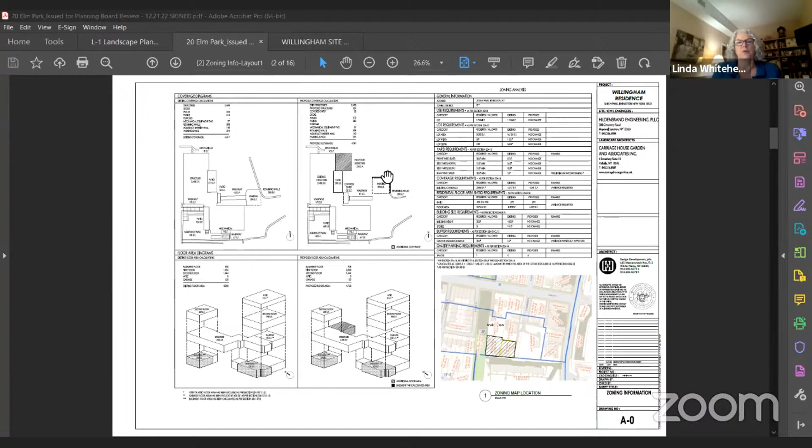If you could just bring up the site plan and briefly go through it. We have 16 items, so please be brief. We were trying to be brief, but yes, Nick, can you bring it up? Mark Schulman is the architect from Design Development. Will take you through it quickly and remind you what we're proposing to do here. Just the site plan.

Good evening, everyone. As Linda said, my name is Mark Schulman. I'm the architect with Design Development Architects in White Plains. Quickly going over this, and I know we presented it last time, but essentially there are a couple of moves being made here. One is an addition on the north side, an expansion of the building footprint that does encroach over the rear yard setback and over the buffer by about a foot. And just to refresh your memory, we've eliminated all work that was actually facing the aqueduct buffer. So this is where we have 2 variances required.

We have also reduced the footprint substantially on that single floor addition. And the other move here is that we have...

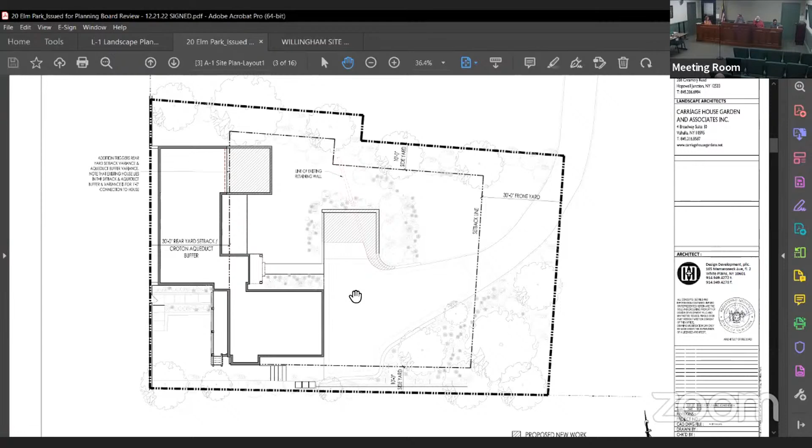Okay, thank you. Any additional comment on the resolution from the board? No comment, no comment. Going to take a vote. Did Dan authorize me to sign? Dan authorized signature, okay, I approve. Dan, you need to vote and designate Sarah to sign. Okay, I approve and designate Sarah to sign for me. I approve. I approve. I approve. Okay, we're done with that.

Thank you very much. I like your surfboard in the back, or is that a paddleboard? Yes, that is a paddleboard. Thank you very much, have a good evening, good night. Mary Ann, I hope you feel better. Yeah, thanks.

Now we're moving on to number 2, 2022-35, 15 Jaffray Court. While we're waiting, I should note that we had a second letter from the neighbors, Maria and Peter Agudino, concerning drainage.

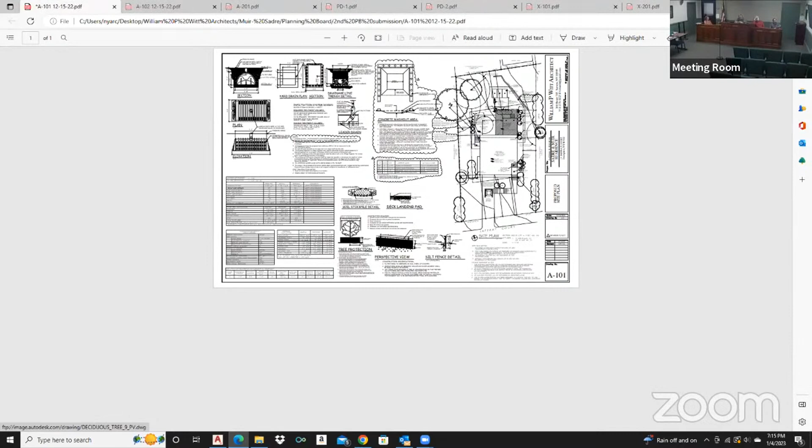In addition to those plantings, we are proposing some additional low plantings on the west side of the deck. That should be nicer to look at, and also aid in some water runoff that may happen from the deck in that area.

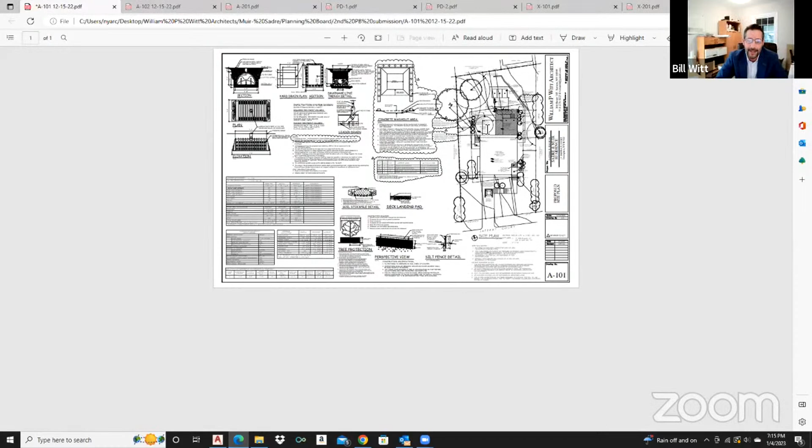In addition to that, we were asked to clarify the under-deck materials. There were notes on the plan specifying that under the deck, we are going to install 6 inches of crushed gravel over a fabric soil separator. That is really meant to mitigate any water that perks through the deck.

As far as the deck details, which aren't part of the site plan or the floor plans, we are proposing to use Trex decking, noted on the elevations. Trex decking gets installed with a standard hidden fastener, which allows a 1/4-inch gap between deck boards, industry standard for this type of decking material.

Much bigger than that creates a hazard for people walking on it with heels. Much less than that, it doesn't allow the water to percolate. Obviously 1/4-inch is ideal. You could go as low as 1/8, but with deck hidden fasteners, 1/4-inch is what's presented.

Another item we were asked to do is propose a concrete washout area. That has been proposed in the staging area of the driveway.

In addition to that, there were a few comments from some neighbors. They basically had to do with foundation plantings and location of AC condensers. Again, I pointed out that that was relocated.

There were some concerns about dust, and we've added a list of dust control notes on the plan. So if work is happening on dry or windy days, we're proposing to spray down the site with water occasionally just to keep the dust down. I don't anticipate much of a problem, since the exterior work is really excavation in the back of the house, so we don't anticipate much of a dust issue.

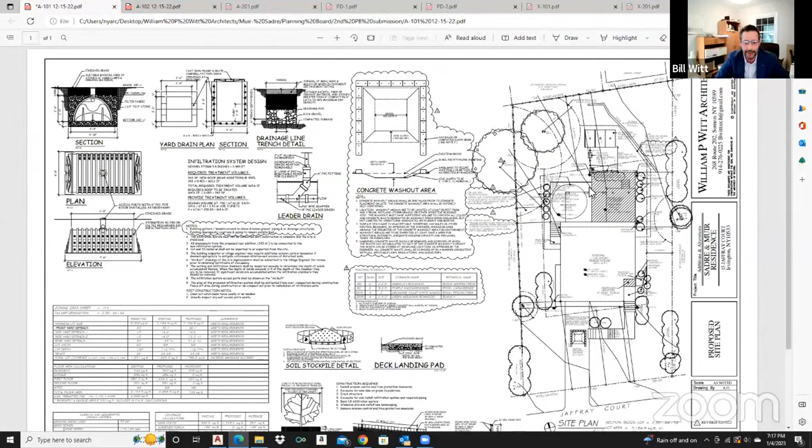Could you briefly go over the magnolia tree protection? Sure, let me just zoom in.

After speaking with the landscape architect, she recommends that we install 3/4-inch plywood sheets over 8 inches of wood chip, just to prevent any compaction of the soil or damage that might occur with vehicles. That tree is approximately 6 feet off the fence line, and I know there might be a discrepancy on what I'm calling the critical root zone there.

But the only work happening in this area is 3 piers to be dug for a deck foundation. The rest of the work is outside the area. I believe there's a note on the plan about accessing that side from the right of the property, limiting machines from traveling over that critical root zone.

Okay, there was a comment about the new plantings on the east side not impacting the neighbors' plantings to the east. We actually had a conversation with the neighbor, and we all agreed there were substantial plantings on the property line, and that any new plantings should be considered foundation plantings to soften up the house, not necessarily to provide screening. They enjoy being able to look through the properties, and like that there's no fence there now. Both the neighbor and the new homeowners would rather not plant a row of arborvitaes down the property line.

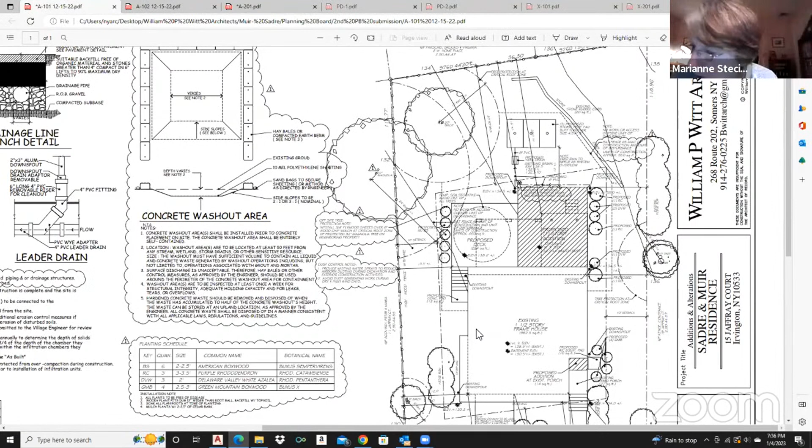Thank you, Dan. Go ahead, Mary Ann. Yeah, in November 2022, Lauren Muir and Nader Sadre applied for site development.

Hold on, Mary Ann, hold on. Did you raise your hand? Yes, I did. Would you kindly come up? I guess you want to come up if you raise your hand.

Yeah, certainly do. I tend to disagree with the dormer. The dormer now does not have a gutter and leader system. In the 25 years I've been there, the water has dripped from the entire length, maybe 12 feet, or 8 feet, 2 feet, whatever it is, of the dormer into the gutter below. It was never directed into a skinny downspout, into a steep pitched roof, and then into a narrow 4-inch K-style gutter. That will cause an overflow condition, no doubt in my mind. And not only would that be detrimental for me, it would be detrimental for the homeowner on its foundation side.

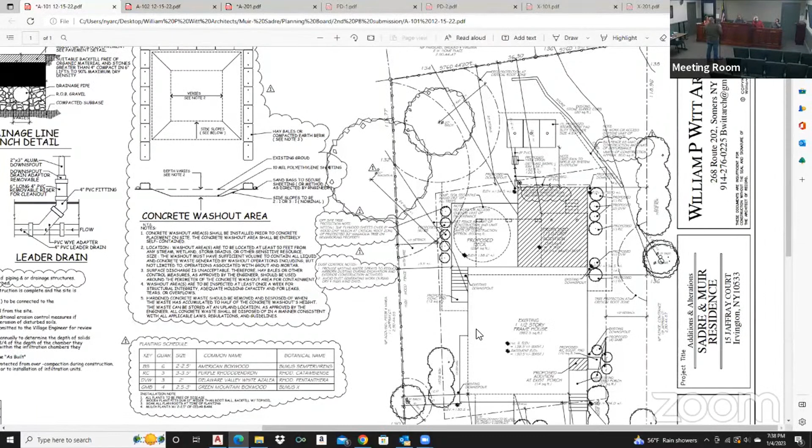Okay, thank you. I'll ask the engineer to take a look at that again. Doug, you hear what he said? Yeah, right now it runs off the dormer and into the gutter. In the future condition, it'll run from the dormer to its own gutter, to the same gutter system. If that overflows, it's going to go back to the same gutter it goes to now.

Doug, can you just show us where this is occurring?

Bill's circling it right now. Yeah, this is approximately an 8-foot wide shed dormer that doesn't have a gutter on it.

I'm proposing a gutter and a leader drain that's just going to collect the water, prevent the water from overflowing the roof in front of windows that might be open, and coming down to a short leader that dumps it down to the existing roof.

Still the same amount of water being collected in the same drainage system. Again, this is not a large house to begin with. It has leaders on both ends of the roof. I feel fairly confident that it's more than adequate with the new gutters to collect the existing amount of water and direct it into its existing location.

The amount of water is not changing. It's just being collected so that it doesn't go over the window on the dormer. I think his concern is that instead of allowing the water to shed over the dormer over the 8 foot, it's being collected into a 1 leader drain. I just don't think that's enough of a roof to cause any issue.

So if I could. Go ahead. Bill, leave that up there. Sure. Mr. Agavino? Could you just go up to where it's circled and with your finger point out to us what your concern is?

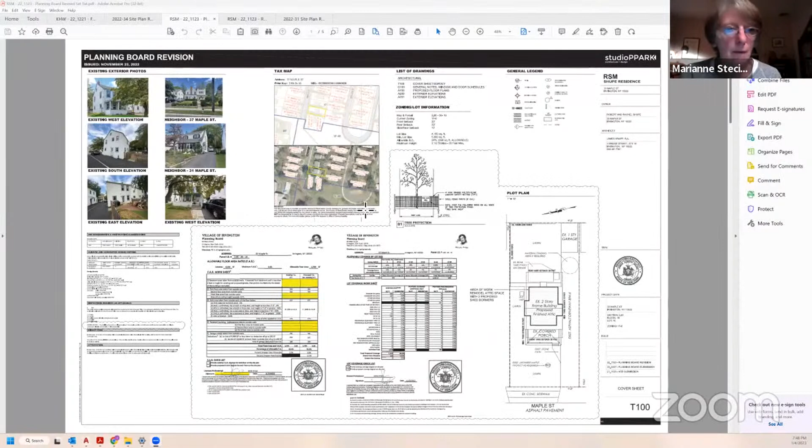Just put up the view of the front of the house. Sure, I can share my screen, correct? Can you guys see me? My screen now? Yes, yes. Okay, great. So, here's the existing, previously approved, and proposed as of today.

And they meet all for coverage. Yep, yeah, everything is under, we're here basically for site plan approval related to FAR, and view preservation, as opposed to any variances of any kind.

You had view preservation issues, which was taken care of. Large tree protection, I have a note. Do you have tree protection? Yes, we specified tree protection for the Japanese maple in the front. We don't believe we're going to be anywhere near it, but we are ready to take care of it as needed.

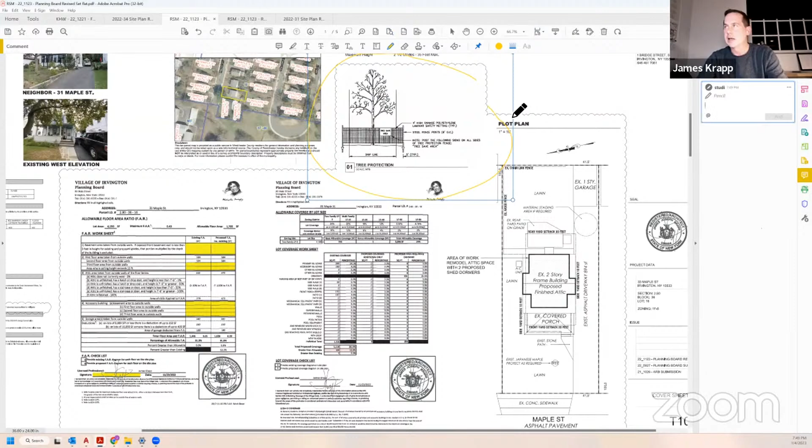Okay, any comment from the board? No comment. No comments. Sarah, anything from the public? Nobody's raising their hand to speak, and there are no comments in the chat.

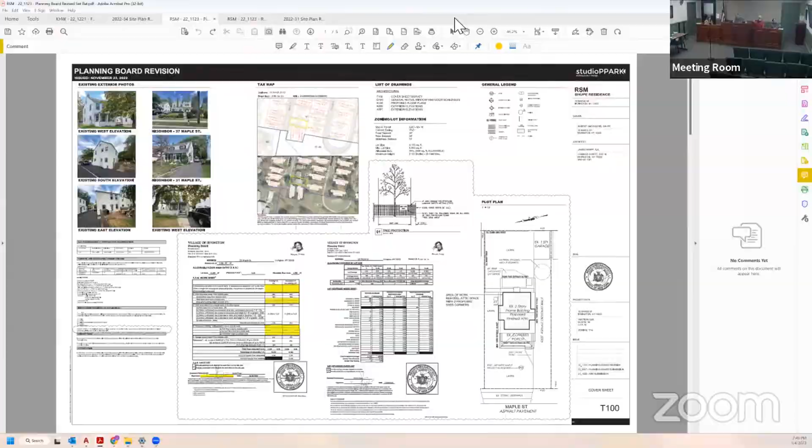Thank you. Mary Ann, you have a resolution prepared? Yeah, whereas in November 2020... Yep. Mary Ann, you're going in and out.

Okay, I don't know what happened. Can you hear me now? Yes. Okay, and I think you probably heard the first part: Hahn Engineering reviewed the plans and in a memorandum dated October 31st, 2022, made a number of comments which were addressed in a subsequent submission. Suzanne Nolan, the village's landscape consultant, reviewed the plans and made several recommendations which were all addressed in a subsequent submission.

The planning board held a public hearing on the application on November 2nd and January 4th, 2023. The proposed improvements would not negatively impact the view of the Hudson River from neighboring properties, and the action is a Type 2 action under SEQRA and therefore requires no environmental review. Now therefore be it resolved that the planning board grants the application for site development plan approval for the improvements reflected in the drawings entitled Shoup Residence, prepared by Studio Park Architects and Design, with sheets specified, and there are no conditions.

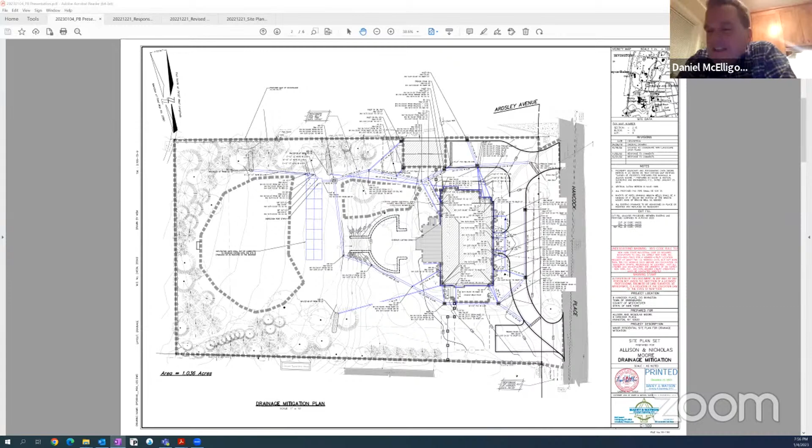Okay, thank you, Mary Ann. We have a motion. Motion to approve. Do you have a second? Second. Approved. Approved. Approved. Approved and designate Sarah to sign for me. Well done, good luck with that, and it looks like it's going to be a very nice result. Thank you very much.

The next is number 5, 2022-32, that would be 242 Harriman Road.

Good evening, hello. Can you hear me? Hi, yes we do. I'm Nancy Rosner, the property owner at 242 Harriman Road. My landscape architect had a conflict until 8:30 and asked me to jump in and see if you could move us to later. I think we're okay. If you want to go later, it's going to be late. We understand that, she felt she should have a presentation available. What time would she be available? She said 8:30 at the earliest. We'll still be here, we'll come back. Okay, I appreciate it, thank you. Around 9 o'clock we'll come back to this one. Thank you so much.

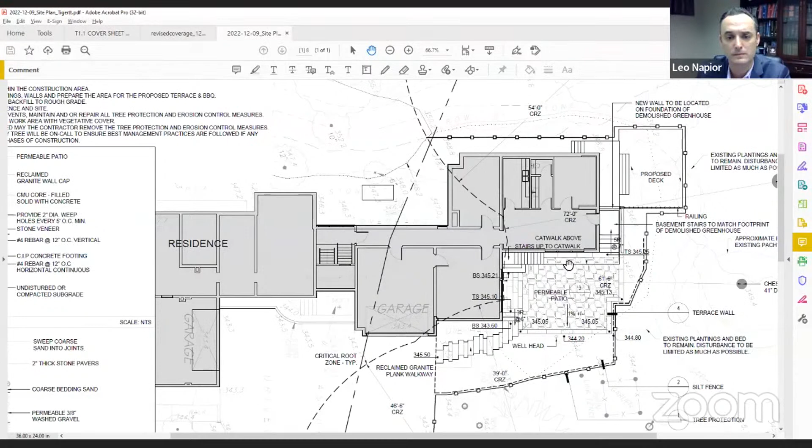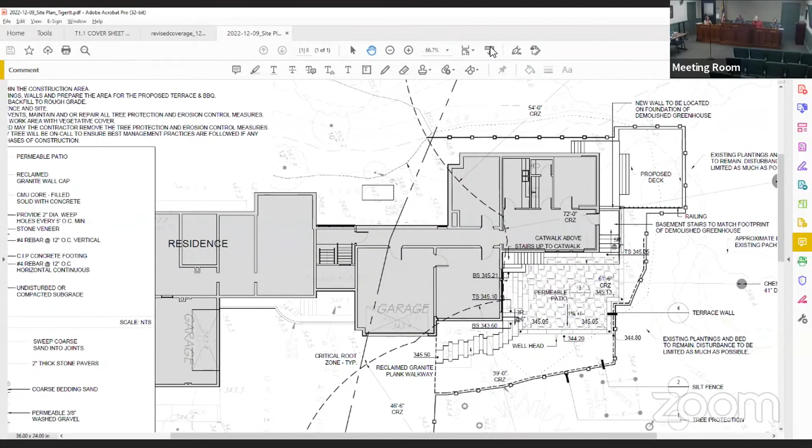Ed, you have the new numbers? We went over them on Tuesday. Okay, they have not yet gone to the ZBA? No, not yet, but they need to. Okay, and you're happy with the FAR and coverage numbers? Delighted, delighted - that's what Teddy Roosevelt used to say, delightful. Anyway, thank you very much.

Any comment from the board? No comment, no comment, no comments. Dan? I have no comments. Thank you. Sarah? Nobody's raising their hand to speak and there are no comments in the chat. Okay, thank you very much. Mary Ann, do we have a resolution? Yeah.

Whereas in November 2021, William Tiggert applied for site development plan approval to construct patios and a deck at his property at 59 Havermeyer Road. Whereas Hahn Engineering, in a memorandum dated November 2nd, 2021, had extensive comments, including that an existing pergola and shed were undocumented. And whereas in December 2022, Tiggert revised his plans in response to Hahn's comments, including seeking to legalize the pergola and shed. And whereas, although the plans remove areas of gravel, permitted coverage is still exceeded, necessitating a variance from the zoning board of appeals.

And whereas Hahn Engineering reviewed the revised plans and in a memorandum dated December 30th, stated that all engineering issues were adequately dealt with. And whereas the village's landscape consultant reviewed the 2021 plans and made several comments which were addressed to her satisfaction in the subsequent submission. And whereas the planning board held a public hearing on the application on November 3rd, 2021 and January 4th, 2023. And whereas the action is a Type 2 action under SEQRA and therefore requires no environmental review.

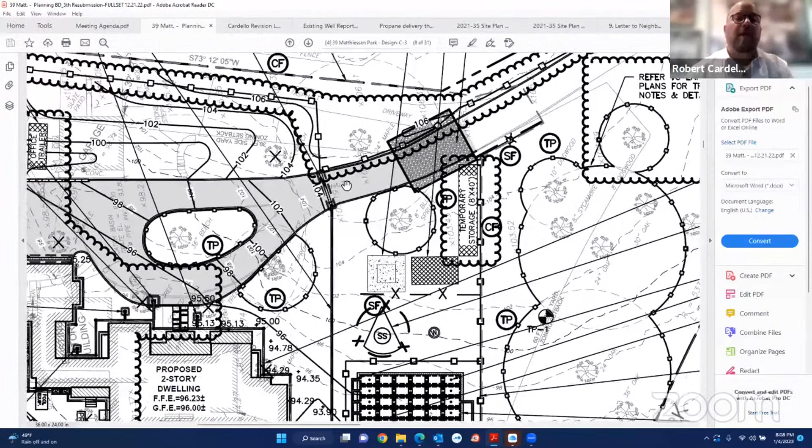The original application - interested in the location of the trailers, that's all. Oh, that's it. Okay. We have the storage container here noted as 8 feet by 40 feet, and the office trailer back here, which is noted as 8 feet by 20 feet. We had a storage trailer too somewhere. It was the first one I showed. Oh, okay. And I think I requested a fence, which I think I see there.

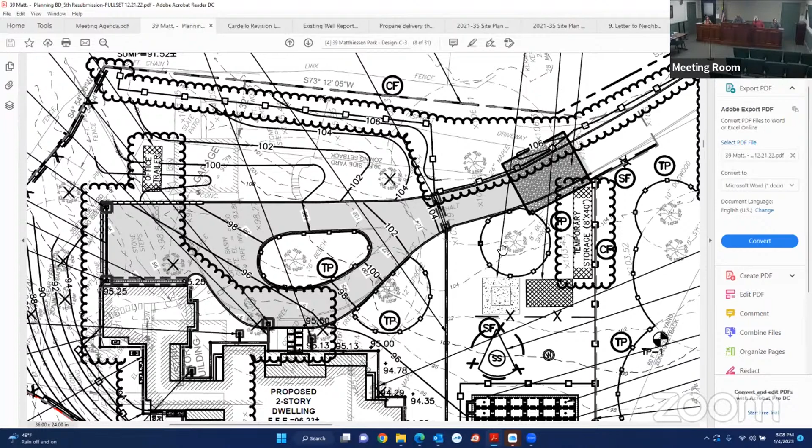Yes, along that juniper line, the junipers to the east would be protected, their roots would be protected. Is that the fence there? Yeah, you see it running along here with the bubble note representing that it was added to the application. Okay, thank you. Any comment? No comments. Mike? No comments. Sarah, any comment? Nobody's raising their hand to speak and there are no comments in the chat. Okay, thank you very much.

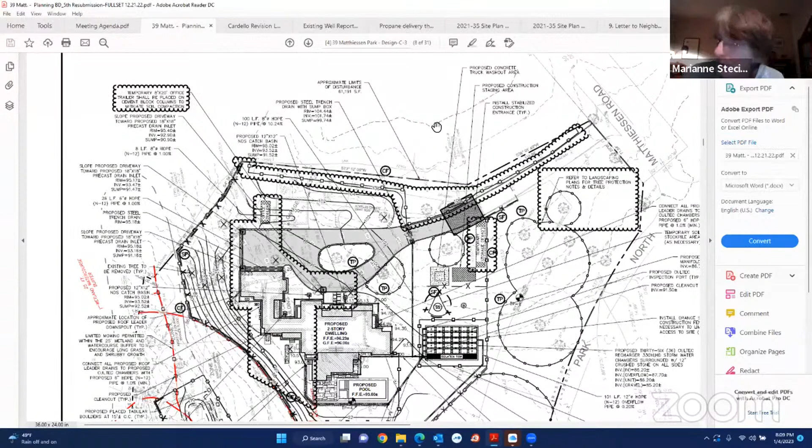Whereas on December 1st, 2021, the planning board granted to Lisa and Robert Bittencourt site development plan approval along with floodplain, wetland, and water bodies and watercourses permits for the demolition of an existing house and pool and construction of a new 2-story house and pool, patio, and retaining wall at the property at 39 Matthiessen Park, which is located in the View Preservation District. And whereas because the proposed amount of disturbance exceeds 1 acre, a notice of intent was filed with the New York State Department of Environmental Conservation. And whereas on November 23rd, 2021, the Zoning Board of Appeals granted a variance for location of the proposed pool in the front yard.

And whereas in December 2022, applicants applied for revised site development plan approval to add HVAC condensers, pool equipment, a generator, a new domestic well, a new buried propane tank, a temporary contractor office trailer, and a temporary construction storage container. And whereas Hahn Engineering reviewed the plans and in a memorandum dated December 5th, 2022, reported that the proposed changes would not have a significant impact on the site or stormwater design and would not affect the previously issued floodplain, wetland, and water bodies and watercourses permits, but did list several other issues which were addressed in a subsequent submission. And whereas Suzanne Nolan, the village's landscape consultant, reviewed the plans and made 2 recommendations which were addressed to her satisfaction in a subsequent submission.

Whereas the planning board held a public hearing on the application on December 7th and January 4th, and whereas the proposed changes would not have any effect on the view of the Hudson River from neighboring properties, and whereas the action is a type 2 action under SEQRA, therefore requires no environmental review.

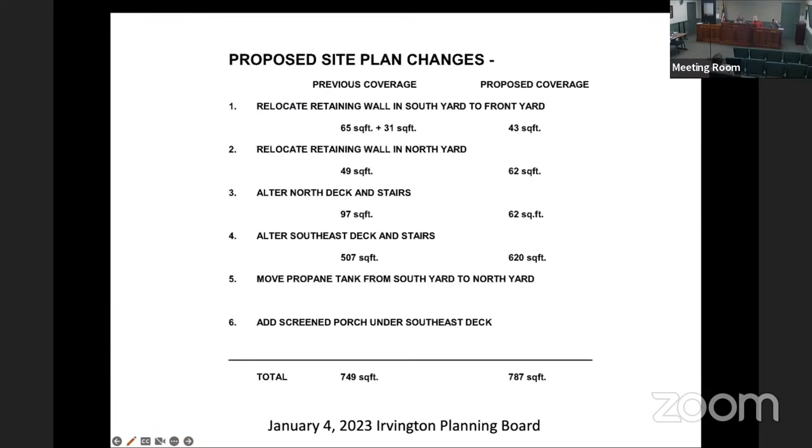It'd be nice if you had the site plan up so you can point to it. I'll switch to that then, just remember there are 6 things. Okay, so let me get down to that.

That results in a net reduction of site coverage. A second item is on the north side of the house. We had a retaining wall here before with a series of stone steps coming up to an entrance and a terrace. We've eliminated that retaining wall, that terrace, and those sets of stairs, replacing it with a new, smaller retaining wall and exit from the family entranceway, just a small set of stairs coming down onto a stone pad. This is going to give them a better play area. I should go back - one of the reasons we did this on the south side is the neighbor to the south has asked us to increase the number of large trees being planted.

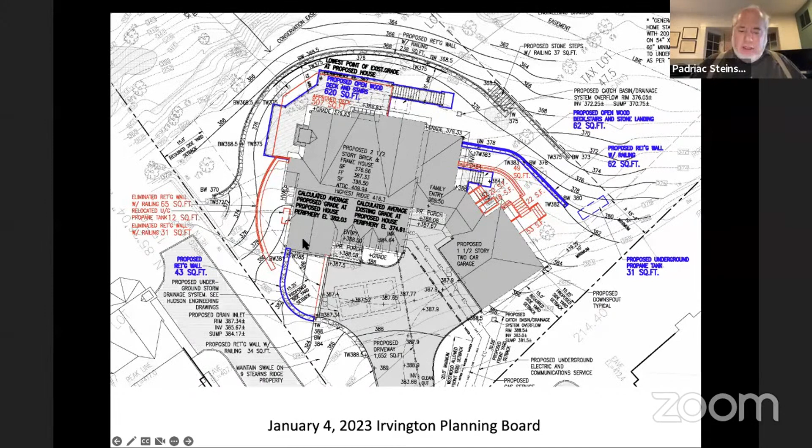If I go back a couple, I did have some photos that demonstrated what that whole feeling was. Up in the upper right-hand corner here, you're seeing 9 Stearns with 7 Stearns to the right. If I blow that up, you can start to see how they relate to one another. The area where the chimney is, that's just plywood right now, but it'll be brick. The deck is right next to that. It's an 8-foot deep deck, so it's not a large deck, and it's actually quite a distance away from the Benais's house.

Is the 8 foot the new dimension? The new dimension is 8 foot. So you said there's a porch underneath the deck? Yeah, what they would like is a screened area underneath the deck so that in the summertime they're not bothered by mosquitoes and bugs and stuff. That's fully underneath the deck - you won't really see that from anywhere.

So when you bump out the deck, you're bumping out the screened porch also? The screen porch will be following the deck exactly. So the structure is actually bumping out, not just the deck? The screen panels, yes - it's a relatively transparent structure, but it is a structure. Yeah, it is.

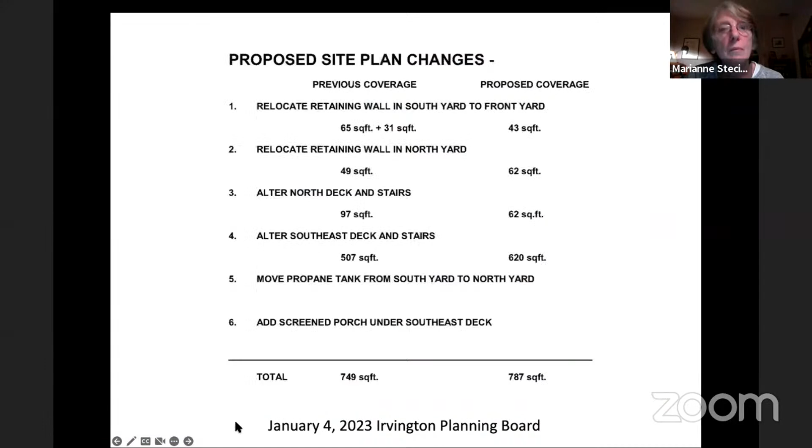Okay, so I've got to do both copies. Are you still writing it? I'm going to the second copy now. I'm printing, not writing. The second one I got better. Keep that copy for the village, give the messy one to Patty. That's fine, I don't mind.

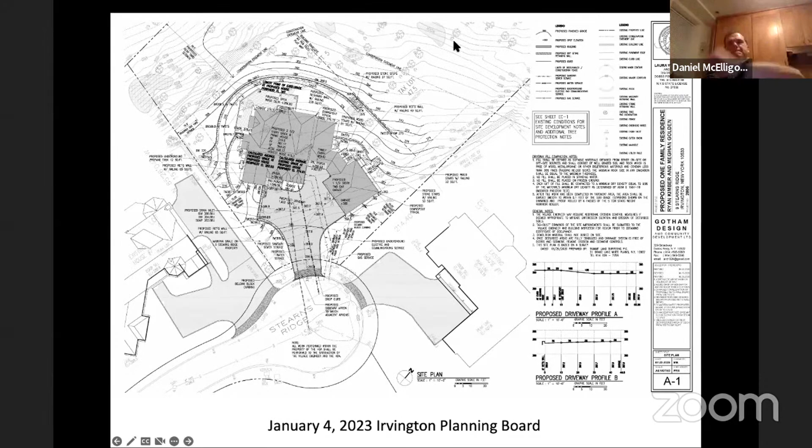Okay, we need to revote. I make a motion to approve the amended version of the resolution, since we didn't vote before. I make the motion that we approve the amendment, the handwritten amendment regarding the at least 3 large Norway spruce trees. Second. I vote yes. Approved. Approved. Approved, and designate Sarah to sign for me. Okay, thank you very much.

Moving on to number 10, and then we'll come back to 242. Number 10, 2019-20, that's 2 Barney Park.

John Malone, Ferguson Malone Architecture, presenting the Honstein, Ray Honstein project. This is a slight modification to what we presented last week, which was the addition of a small walkway. We had a permit process for a generator going under a separate course, and Ed reminded us that if the site development plan had been resolved and closed out, that would have been appropriate, but it's still not closed out, so he asked us to add the generator to this proposal.

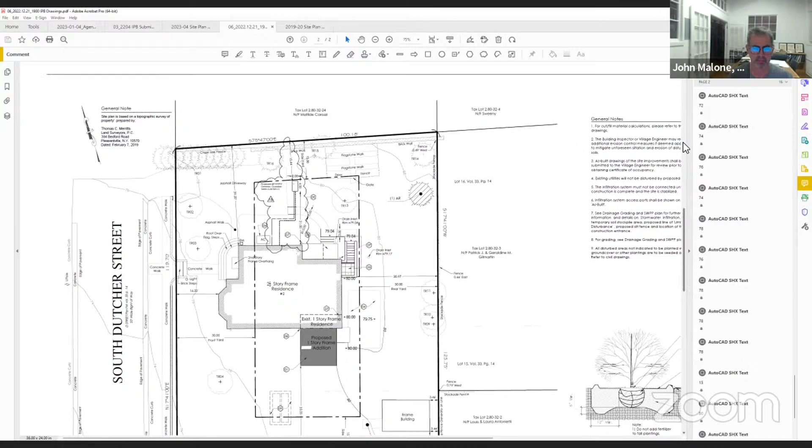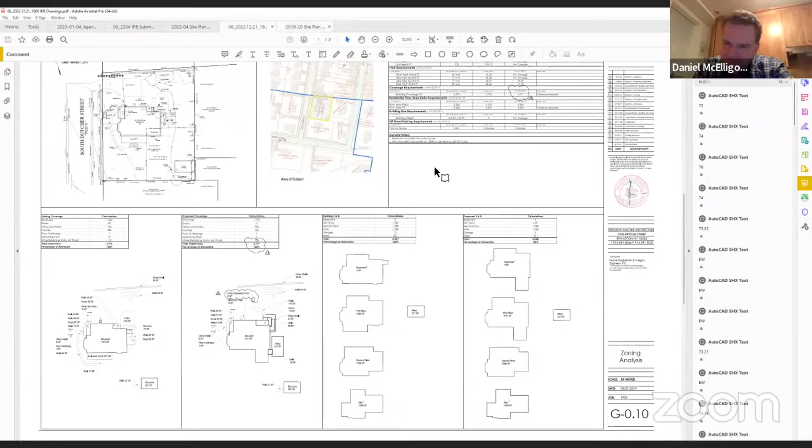Okay. Anything else, John? I think that's the only change on this one. Okay, thank you. Any comment from the board? No comment. Mike? No comments. Dan? No comments. Thank you, Mary Ann, do we have a resolution on this?

Whereas on October 2nd, 2019, the planning board granted site development plan approval to Laura Gray and Robert Honstein to construct an addition to their house at 2 Barney Park, along with a patio, walkways, and other improvements. And whereas in 2019, the proposed improvements received a coverage variance from the zoning board of appeals. And whereas on December 7th, the applicants received revised site development plan approval for an additional walkway on the site, which requires a new variance from the ZBA. And whereas in January 2023, applicants applied for further revised site development plan approval to install a generator requiring a variance for the additional 8 square feet. And whereas Hahn Engineering reviewed the plans and in a memorandum dated December 30th found no issues with the application.

Whereas the planning board held the public hearing on the application on January 4th, it's a type 2 action under SEQRA and therefore requires no environmental review. Now therefore be it resolved that the planning board grants the application for site development plan approval of the improvements reflected in the drawings entitled Gray Honstein Residence prepared by Ferguson Malone Architecture, subject to receiving a variance from the ZBA for coverage.

Sarah, was there any public comment which I didn't ask before? No, no one's raising their hand to speak and there are no comments in the chat. Okay, thank you.

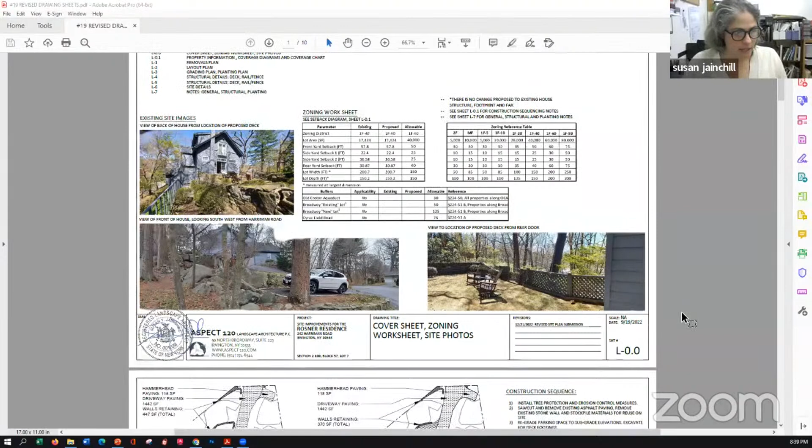We also addressed a number of issues in the drawings, including just readability of the drawings, as well as adding information, including a grading plan and a planting plan, as well as a deck design detail stamped by a structural engineer. And what you're looking at right now is the first sheet that shows the site conditions, which you've already seen at the last time I presented here, as well as the coverage information.

All or mostly native, if not all native. I'm not sure if Phlox is native, but close enough - not invasive, of course.

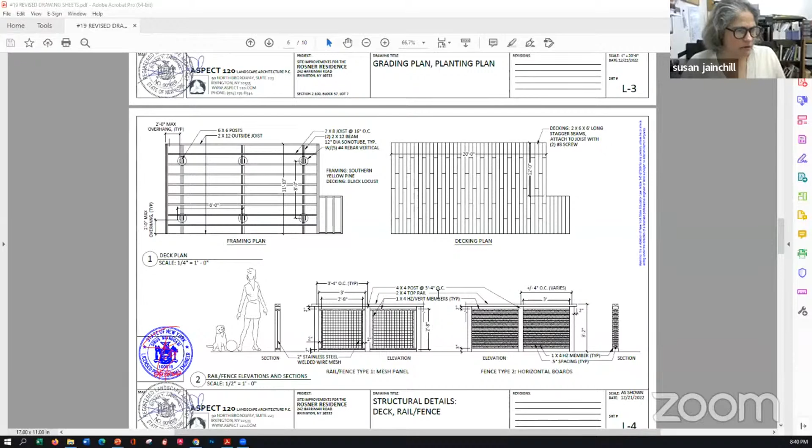Here is the deck plan, the framing plan, and the decking plan, and then this is the design for the fence slash railing, which is 3-foot high.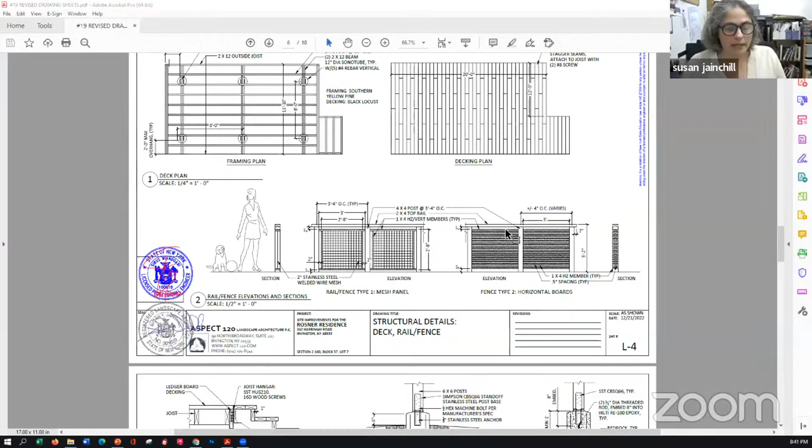And in some areas where it's looking into the woods, we have the mesh. In other areas where it's adjacent to the neighboring property, we have slats, horizontal slats, that is blocking most of the view, but not a solid kind of statement saying we don't want to see you.

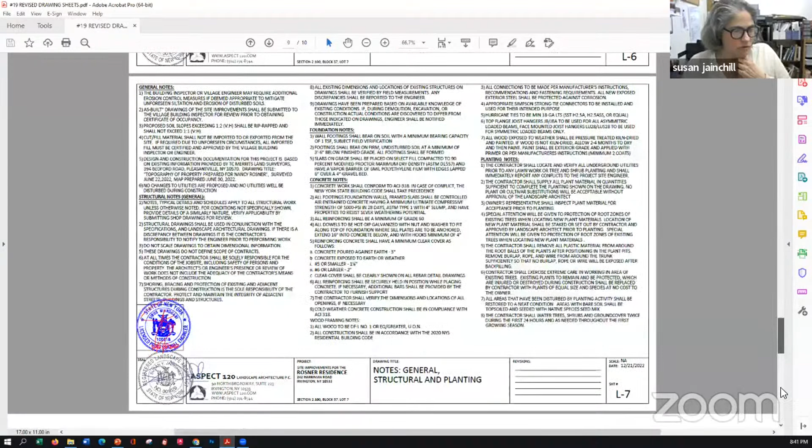So we have all the details stamped by a structural engineer, Cyrus, planting details, as well as the details for the erosion control, as well as the protection of existing trees. And on the plans, we also showed where that fence will go around the existing trees that is closest to the construction. And then all the notes as required by the village engineer.

So we've gone through all that process, and I believe the village engineer stated that we had addressed his concerns. And I believe the next step, we would want to be referred to the Architecture Review Board. Is that correct? Yeah, yes, yes. Okay, so I guess that is what we're requesting, to have that referral to the Architecture Review Board.

Okay, thank you very much for the presentation. Do we have any questions? No questions. I have no questions. No questions. No questions. Dan, no questions.

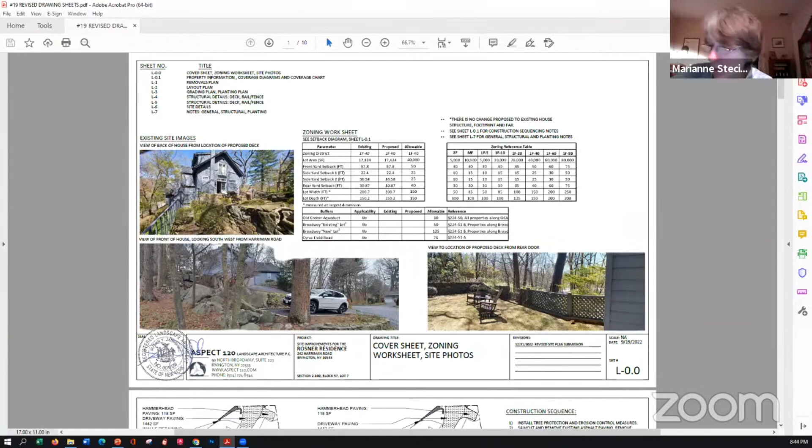And whereas Hunt Engineering reviewed the plans and in a memorandum dated October 31st, 2022, made a number of comments, all of which were addressed in a subsequent submission. And whereas Suzanne Nolan, the village's landscape consultant, reviewed the plans and made several recommendations which were addressed to her satisfaction. And whereas the planning board held a public hearing on the application on November 2nd, 2022 and January 4th, 2023. And whereas the action is a type 2 action under SEQRA and therefore requires no environmental review.

Now therefore be it resolved that the planning board grants the application for site development plan approval for the improvements reflected in the drawings entitled Rosner Residence, prepared by Aspect 120 Landscape Architecture. No conditions. Okay, thank you very much. Any questions on the resolution?

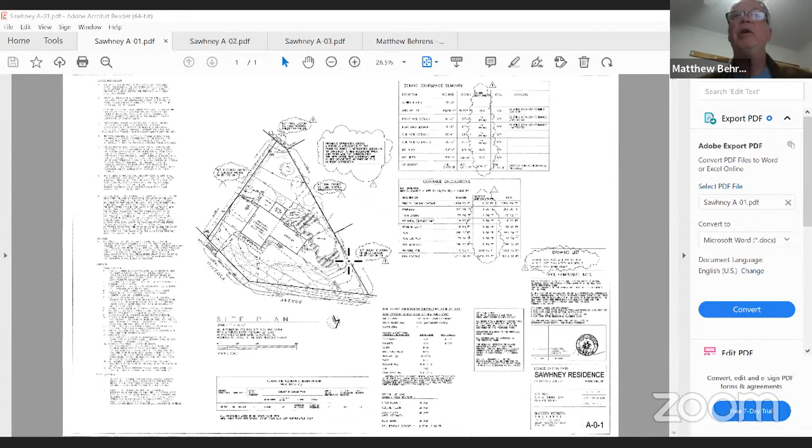Oops, sorry, what's happening? Bear with me. Bring up the site plan. Okay, let me see if I can zoom in. Could you blow that up a little bit so we can see the site plan? Certainly. There you go, that better?

Good, yep good. So the application is to legalize this shaded area, this existing concrete patio. This was built sometime between 1998 and 2010. It does exceed the coverage. There were a couple of, at last month's meeting, it was raised, there were a number of issues with the application, including not only the coverage, but also the issue of the sewer easement.

I also wanted to clarify that I did state in the previous meeting that the current owner built the patio. He did not. I have confirmed with the owner that this was an existing condition when he bought the house. So that hopefully clears that up. The issue with the coverage is addressed, I'll share that in a second.

And then you can also see here where the sewer easement is, that the patio does encroach on the sewer easement. And I think one of the Hunt Engineering comments was also that the fence crosses the easement at a couple of points. So in various conversations, and we've documented it on the drawings also, the owner has agreed to remove that section of the patio if access to the easement is ever required. Obviously the fence needs to stay, but it could be removed also if access to the easement is needed and rebuilt.

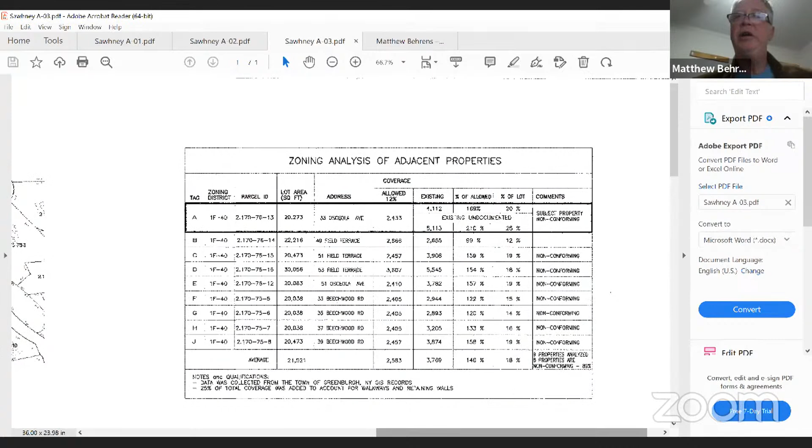So this is an analysis of the adjacent properties. You can see basically that of the dozen properties, or so 10, I think, properties in the immediate area surrounding, this is the properties that were analyzed. None of them are conforming with the exception of one of them, which is just barely at 99%. I do agree that the amount of overage is high based on the others, but none of them are conforming. I think part of that is that they are mostly undersized lots in a 1F-40, 40,000 square foot zone. They are all, you can see, consistently about 20,000 square feet, including the subject property.

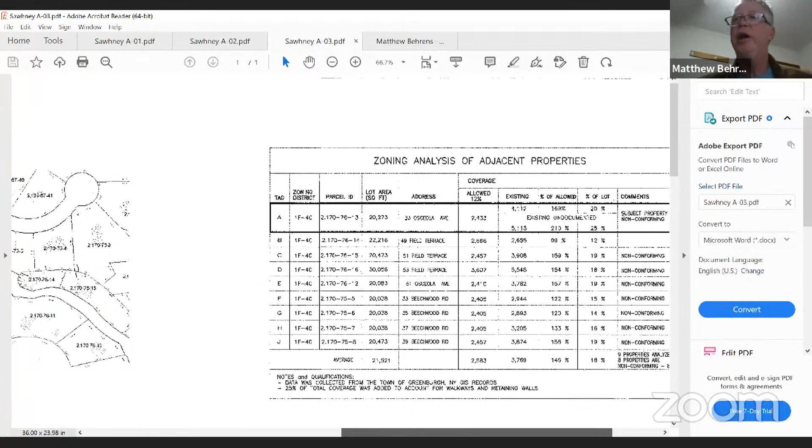So I think those are the major issues that were raised by the board at last month's meeting and also by the Hunt memorandum. I know they came back with a couple more comments I received this morning. I think they mostly addressed some labeling on the lot coverage sheet. This is the sheet on the drawing, the A01 drawing, that's accurate. But I do need to update the drawing, the chart in the application. So I'll do that, and I'll also confer with Doug and make sure we've got everything addressed, any of the issues he was referencing.

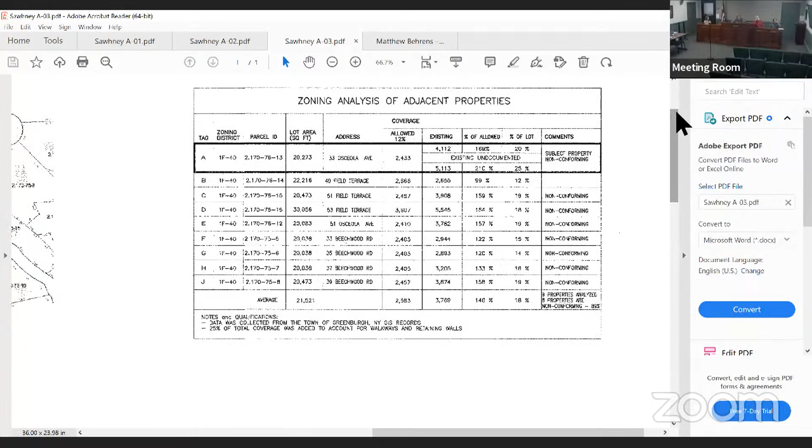Well, I find it a little disappointing. I thought in my comments of last month that we asked for the removal of what's over the easement now, not in the event if the sewer was needing repair. Okay, I'm sorry, Cesar, I didn't recall that, but let me finish, please. Thank you. I can't believe you don't recall that. You can always review the minutes.

And that the entire area adjacent to the sewer was to be looked at for removal. And you were to go back to the 1988 previous approval, which had a patio much smaller than what's there. Get that square footage, and because that square footage was approved, go into the square footage after you remove the part of the patio that's adjacent to the easement, and then we would look at whether or not the coverage is acceptable. The increased coverage over the previously approved coverage is acceptable.

And we look at these kinds of applications as if it's coming in for a new patio, not legalizing something that was done without approval. And to be frank, I'm not sure this board would approve what's there now. So we have to take a careful look at removing what was not supposed to be there.

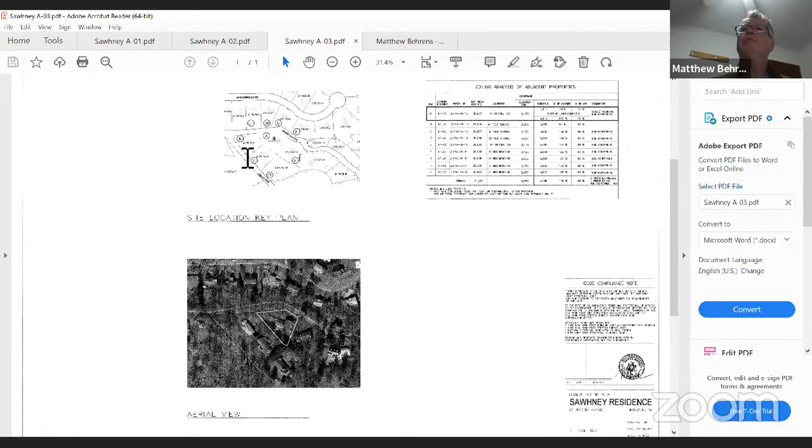Okay, we'll see you in the future. Okay, thank you. All right, we're now moving on to number 12, 2022-30, which is 30-40 South Broadway.

Thank you, Mr. Chairman. Can everyone hear me? Yes, yeah, we got you. How are you? First of all, Lino Sciarretta, partner with the law firm Bleakley, Platt and Schmidt, on behalf of SCE Holdings. First of all, hope you all had a good holiday and Happy New Year to you all.

We are back here, Mr. Chairman, members of the board. We were last year back in December. This is for the renewal of the approvals for 30 and 40 South Broadway. Last time we were here, I know you, Mr. Chairman, had asked for some information on the site plan. We did provide that.

I know JMC, we have Anthony Guccione on this evening, did provide the information requested regarding some elevations, which we did provide, along with an arborist report. Also, we show on the site plan, there was comments last month regarding the easement on the driveway of 40 South Broadway, which we put on the plan. Also, since the last meeting, we were able to obtain from the Board of Trustees an amended resolution regarding the affordable housing units. As the board will recall, last month we noted that the square footage of the affordable units went up, and that was taken into account by the Board of Trustees at their meeting back in December. So we have that, and if there's any other questions the board has, I have Anthony here.

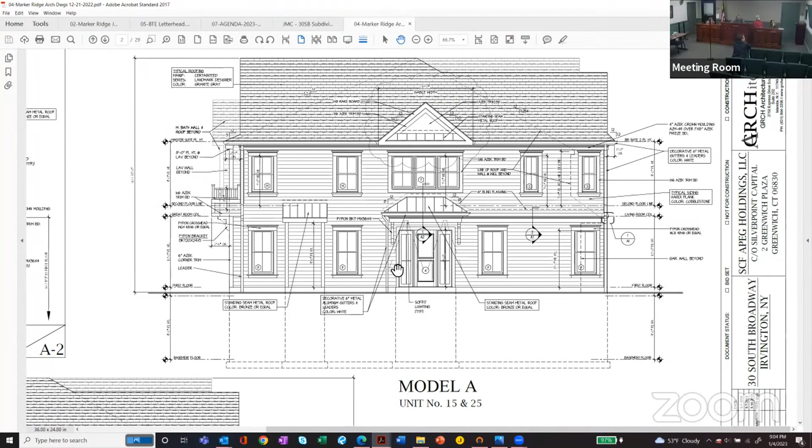This one, what's the rear of that look like? I'll tell you where I'm going with this. I'm concerned about what it looks like from the aqueduct and what it looks like when you're on Station Road, because you're looking at the rear of the building. And when you look at that representation of rear elevation, that's okay, because it doesn't look like a blank wall with a blank roof.

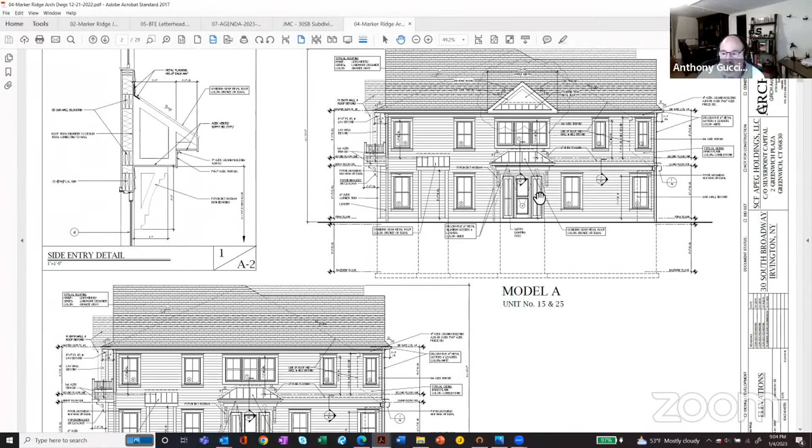I believe that is the rear we were looking at because it does not have garage doors in it. So this would be the rear side. This is a side, I'm sorry, this is a side, this is the other side, left side elevations, there you go. So these are the side elevations. All right, and the other two are the front.

Go back to this sheet. So this is essentially the front, the rear. Let me zoom in a little on that. The rear is consistent for the entire site. Not the internal ones, the ones around the perimeter, that would be the rear. Yes, some foundations shown on the ones that face to the south, the same throughout.

Let me bring up the site plan. Anthony, go to the site plan so we can see which number units are along the aqueduct, and then you can look for them on this. Unfortunately, I'm not sure if he updated his numbering to match our plan, but 5, 6, this is an A, this is an A1. Got the A, affordables B, correct. So the A, the A1, and the Bs are these.

So if we go back to what we were just looking at, you've got this is a Model A, so this is the rear. This is what would face the aqueduct in that rear model that faces the aqueduct. This is the rear of it here on the A model. And then if I scroll down through the set, this is the model A again with the master upstairs, so this would be the sides of it.

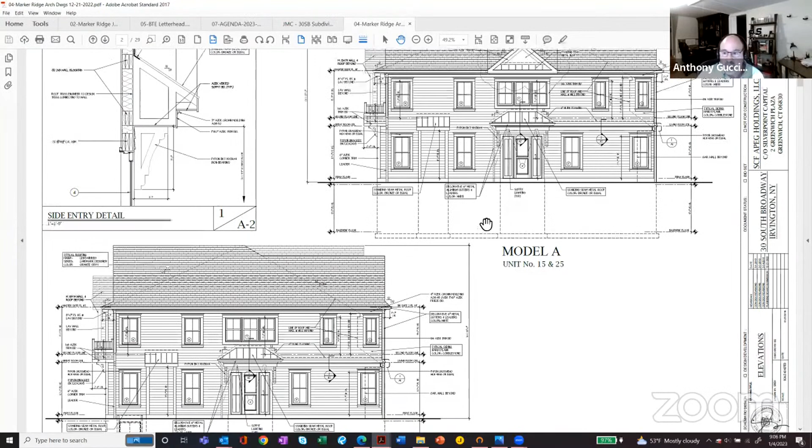Yeah, but this is Model A unit 15 and 25. The other one has Model A units 2, 4, 6, 9, 11, 13. You see? That's why I was saying, look at the unit numbers on the thing. And I think they had 9 and 11. Because 15 and 25 were a different part of it. I'm just not sure if he updated them to match the new numbering system. We changed things, 9's here, 11's here. So they're A models, so that would make sense.

What about the unit 6? 6 was on that thing too, yeah, 6 is an A. Yep, and then 5 and 7 are A1s. Let me look at that one.

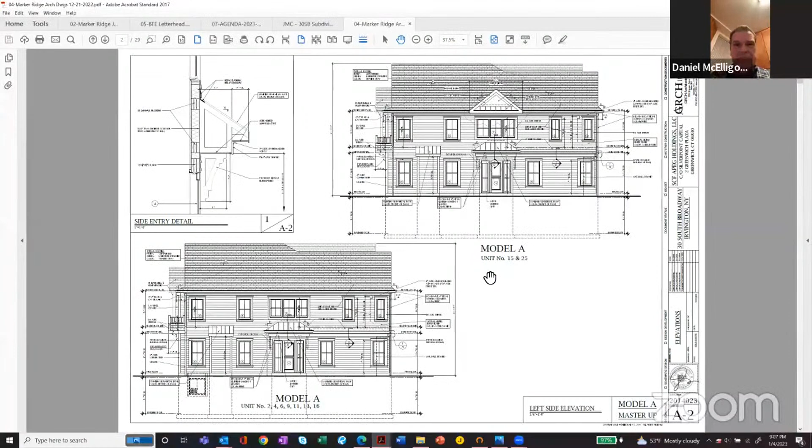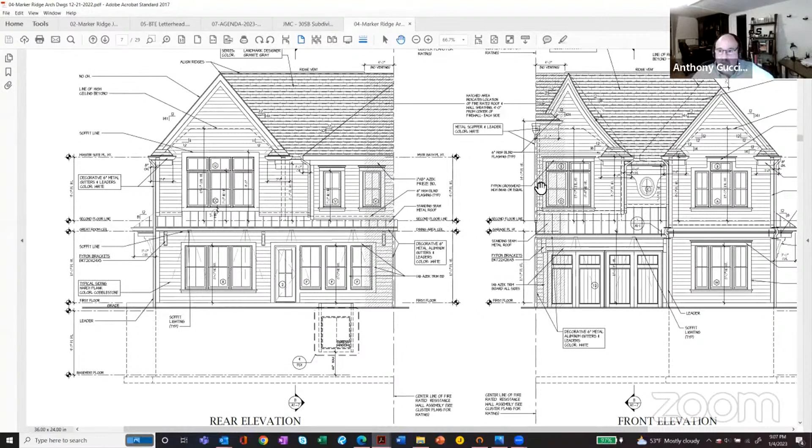So this is an A1, this is 2 of those other units. So this is the front and this is the rear. So this is the rear elevation and this is the front with the garage door in it, the carriage doors. You can see it's the same peaks, the same materials. It's very similar. And then the other one I believe was a B.

And then 8 here in the middle was a B. Otherwise, they're all A's and A1's. So the B... it's A1 again.

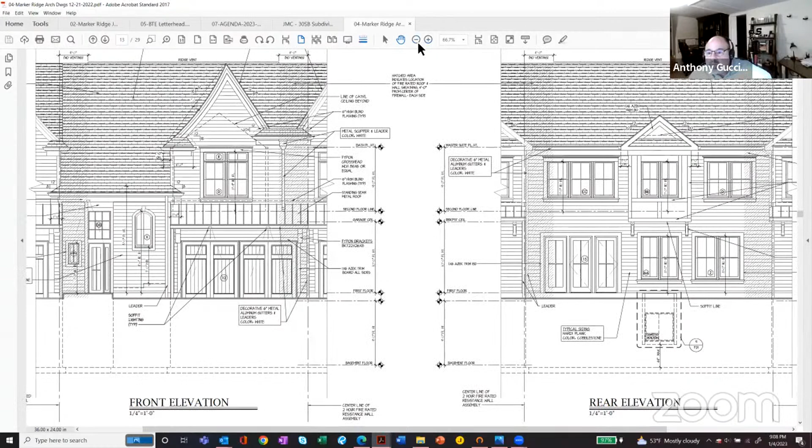This is the B model. You've got the front here on the left and the rear here on the right. It's HardiePlank siding. You can see here, same as in the front, windows and the doors in the front.

The same concern goes for what one sees from Station Road, which would be the south. Let's bring up the site plan and look at the A's and the B's on the south face.

So over here, you've got an A1, an A, and an A1. We already looked at them. You want to see them again? And over here facing the Irvington Estates, you've got A's and A1s as well. So that covers all the unit types.

Thank you. All right, you were going to make a presentation before I interrupted you. I didn't have a lot to say, Lino kind of covered it, just that we did respond to your board's comments, the comments of your consultants.

They did start doing some work at the site this week, some of the remediation work. The owner started with some of the removal of the debris piles, stabilization of the driveway. They started wrapping the partially constructed building with new Tyvek to winterproof it. And then also Bartlett Tree Experts started out at the site today.

They started invasive species removal along the Broadway buffer, and they started to remediate that 40-inch oak. They're doing some mulching and soil sampling to help improve it, the kind of stuff they could do now during the winter.

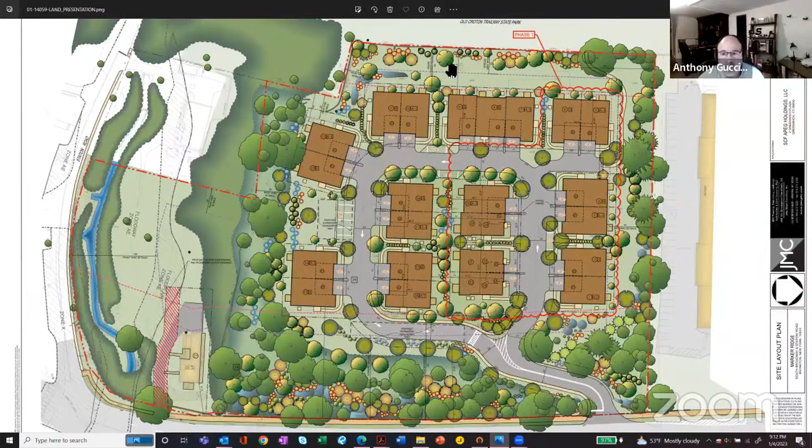Well, you have to be tall enough so you can see them. Right, they have to be taller than the wall. And they will grow, once they get established, fairly rapidly, the evergreens, so we can incorporate that and put some good sized trees in there to start. Thank you.

Thank you, I have no further question. Mike? I'd just like to comment that it would be ideal if we didn't have to use herbicide to deal with that large of a quantity of invasive species, and rather maintain it over time rather than use herbicide.

It's totally possible to do without herbicide, it's just you have to maintain the area. So what's being proposed there is removal, so you would cut everything down at the stumps.

All the shrubs would be cut down at the stumps, and the vines would be cut at the ground and then 5 feet above the ground, so they'd be hanging in the tree until they died and fall out. Then you'd remove all that brush, and it's just a spot treatment of the stumps with this herbicide that'll keep them from growing back as vigorously. You're not spraying it all over the plants and the ground, it's right onto the actual stump of the plant to keep it from growing. So it's a very controlled thing.

And like we said, we've got experts with Bartlett Tree doing that. That's really the way, these are very aggressive species, and to really control them, that's what's needed to be done.

Is it only being used for trees? No, it's being used for shrubs, invasive shrubs and vines. They'd be cut down flush with the ground and then just treat where it was cut. For the vines, where it comes out of the ground, where it was growing. You'll cut the vines at the ground, and typically the vines are growing up and choking out the trees. You see it a lot along the roads and highways. They'll cut that down at the ground, and also cut it overhead so they can move a big chunk of it, and then treat where it's coming out of the ground.

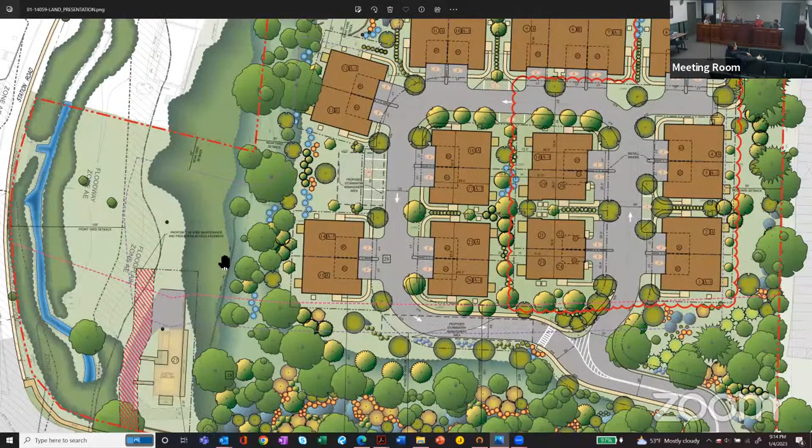At some point Mary Ann is going to want to actually see the wording of the easement, and that'll be tied to some milestone prior to completion of the project. At some point, Mary Ann, it'll be CO of the property, CO of that unit, and they can't sell without a CO. Yeah, there's a bunch of easements they're going to have to provide, and that's one of them. I won't lose track of it.

Okay, and the other thing is, when we first approved this project -- if you're counting on the first approvals -- we didn't have a dark sky ordinance back then, and you need to tell us if you looked at the lighting that was approved, whatever number of years ago, and whether or not today it meets dark sky compliance. Yeah, I believe it does, Caesar and Anthony, because in our comments in James's comments to Hans' memo from last month, I think we do say that it's dark sky compliant.

Anything else you want to add? Nope, we're good, Mr. Chairman, members of the board, unless you had any questions of us. Let me ask if there's any public comment. Nobody's raising their hand to speak and there are no comments in the chat. Any further comment from the board? No comment. Oh, well, good to go.

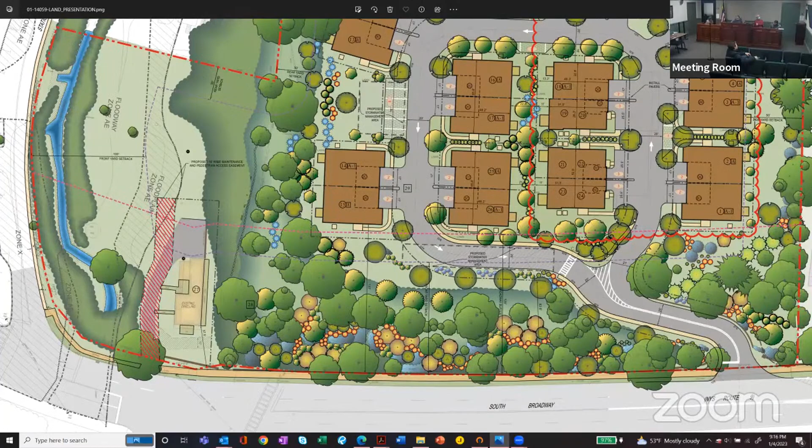Hopefully the work in progress will get done. I know Ed and Mary Ann have a scheduled meeting, and presumably you'll be checking with them. Very good. Ed? The 9th, yes. All right, thank you very much. Thank you all, have a good evening. Thank you very much, good night. Thanks, everyone.

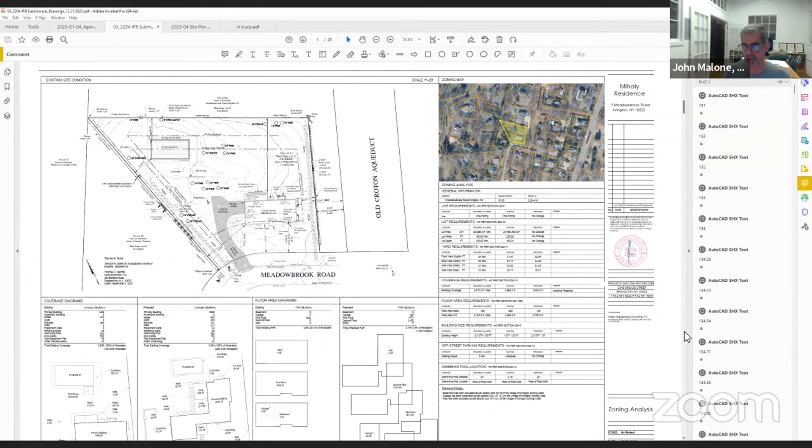This site drops off relatively steeply down to the west and to the north. So the goal of the house is to make a little courtyard area that provides some privacy to the aqueduct and then privacy to the street.

So I can go to the site plan. This is the existing condition. The site plan here has a lot on it, but the outline of the house, this is the actual proposed house, it's here. So this volume is approximately in the location of the existing house, except the existing house is a little bit longer, and this wing is really the additional space.

In addition to that, we're bringing in the driveway at the level of the living space. Right now there's a driveway in the same location that goes down to a basement level garage, so this is providing car access at the main living space of the house, with better access to the kitchen, the mudroom, and other things like that.

The pool is intended to have a relationship with this deck area here and the living space of the house, and that's why it's moved up this way. This is the boundary for the pool, which is really just around the pool area.

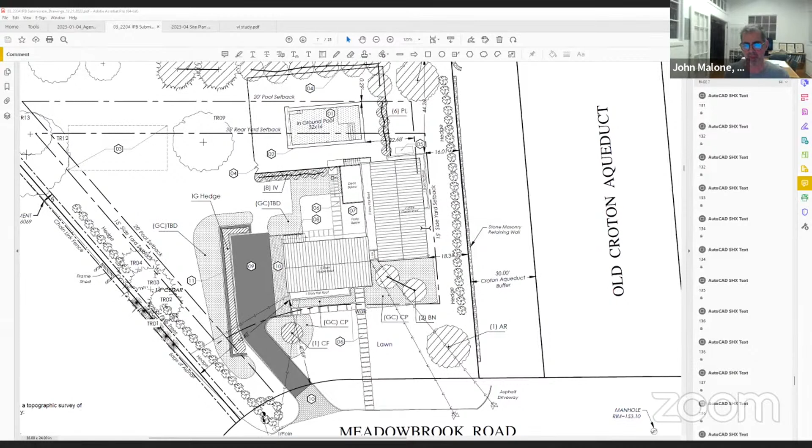And then access to the basement level is down in this lower area. So there's a depressed area here that gives you access to the basement and allows for some windows in the basement. The design of the house—

We have some initial pool drawings from a site perspective. Just quickly, we can go through what the strategy is. The strategy is to put the stormwater system down in this area. We received a note from Han about whether this will perform in that area—we just got that today, so we're reviewing with Hudson Engineering about whether that makes sense, because this area is developed as an existing pool.

I'm not sure if there's something else we can do or how we would relocate it, but basically that would be the use. You can see we're treating all of it—even though there's an existing building there that has no stormwater treatment associated with it, we're treating the whole area. All the development would be treated under this strategy.

The driveway and the access to the house here at the main level requires some grading in this area to let that driveway work. We're trying to keep the driveway as small as we can, and we're trying to keep the existing curb cut.

There's an existing barrier of hedges here that was basically the privacy screen between the adjacent house and the driveway area, so we're keeping that in place. There's also an existing screen of hedges along the driveway to the house to the north, which is buffering. There are two layers of buffer, buffering the building from the aqueduct, both the proposed and the existing.

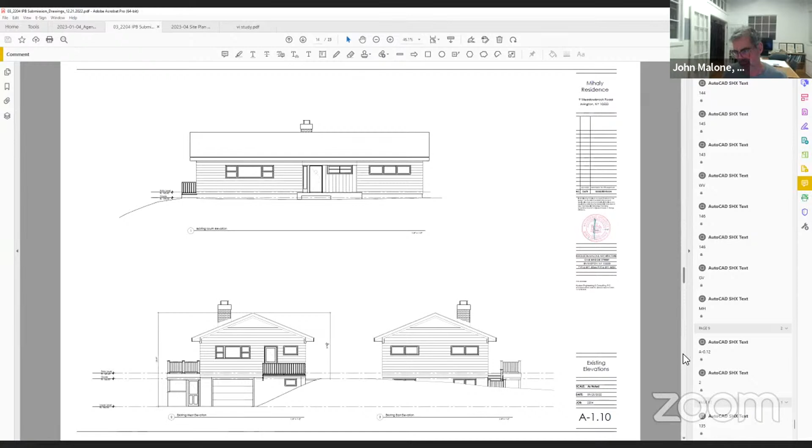The exterior elevations of the house—the family is very interested in maintaining a gable, some form of a gable roof. Because of the height limitations and the sloped site, it's a little difficult to do, so what we've done is maintain a modern low-sloped roof. The house being proposed has this low-sloped gable, referencing the 40s to 60s modernism of a ranch.

So that's where we are in terms of design right now. We received notes. I think we are slightly over coverage. Just to run back to that question, we are at 108 of allowable.

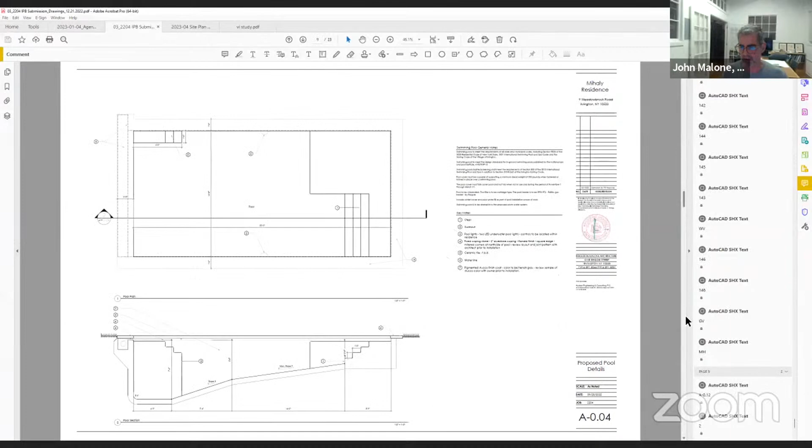We did some analysis just to see where that sat within the neighborhood. We had analyzed 22 properties in the area, or 21 plus our house, that are all in the 20 zone. And the existing coverage that's in place now, even with, right now we're at 105 of allowable, the existing house as it is. So we're adding about 3% of coverage, which is a countable number of square feet to that.

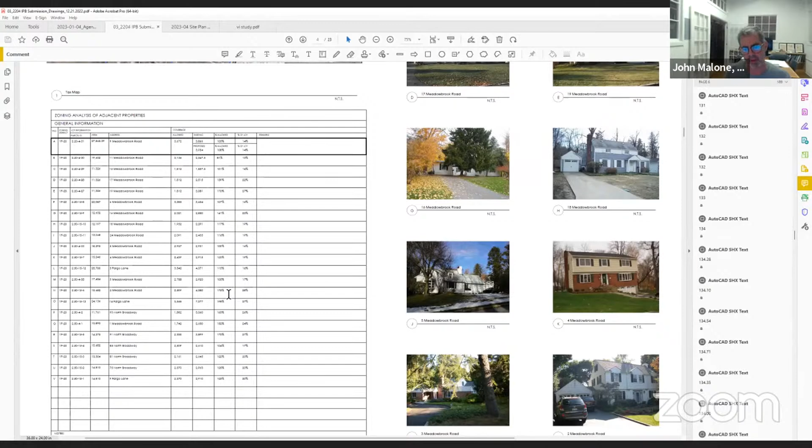It's like 30 or 40 square feet. And if you look at it in the outline here, there's only 4 properties that are below that. Most of them are much higher than that in terms of coverage. So we think in terms of its effect on the character of the neighborhood, it's very much in line with what's there.

Let me go back to the site. I'm sorry, John, I didn't understand. You're reducing what? The 50 feet? The aqueduct buffer is a 30-foot buffer.

So here's the 30-foot buffer typically for the aqueduct. The Croton Aqueduct is here. It's a 30-foot buffer. And we've been told, we understand now that for a tear down or for something that is new construction, it's supposed to be a 50-foot buffer. So right now we're at 48.34 feet, the buffer. So I think we might look and see if we can get the 18 inches out of it, at least for the majority of the house. And that would reduce the variance that we would be requesting for the buffer.

Are you going into? I would stay out of the buffer, John. Yeah, that's what we're in the buffer by about 18 inches at this corner. I think what happened is we actually widened the house, and I don't think we corrected ourselves for that.

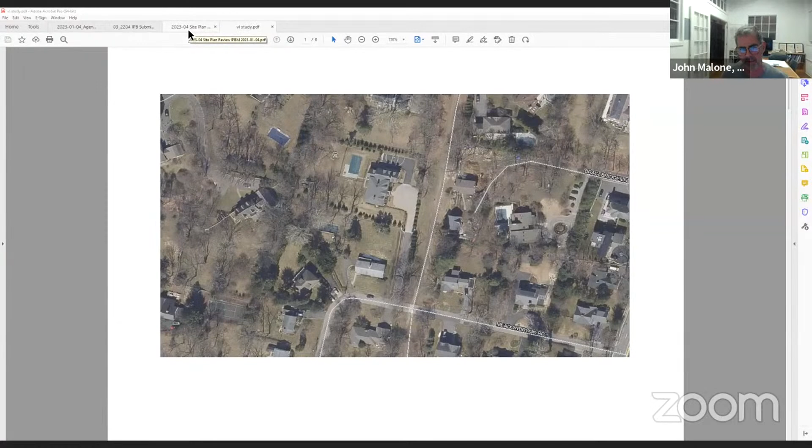Yeah, we could plant it, there's room for some plantings. I think in the planting plan there's some stuff shown there, but we can clarify that. All right, go back to the site plan.

Is that a retaining wall to the left of the driveway? Yes, this is retaining. What's the height of the wall? I think it's 30 inches here, and it goes up to about 48 inches at the corner. Is it the same height as the driveway? I believe so, it's pretty much the same height as the driveway.

You're going to use a lot of fill there? I think from the excavation of the house, we won't need any additional soil to do that.

You didn't show any profile elevations. We would like to see a cut through, going east to west across the driveway and across the retaining wall to the property line, and what that looks like. That's a rather steep slope to the west of the retaining wall.

It is, right, so this is a relatively steep slope, and we did get a note about using riprap on that slope. We don't want to do something as industrial as riprap, so if it needs to be reinforced, we're thinking of this as a planted border that we can fabric reinforce - it's all supposed to be green, but we can clarify.

We'd like to see the cross section of the elevations, from the house to the property line, what that profile would look like. Right, you're talking about through the driveway, basically right through here, from right to left.

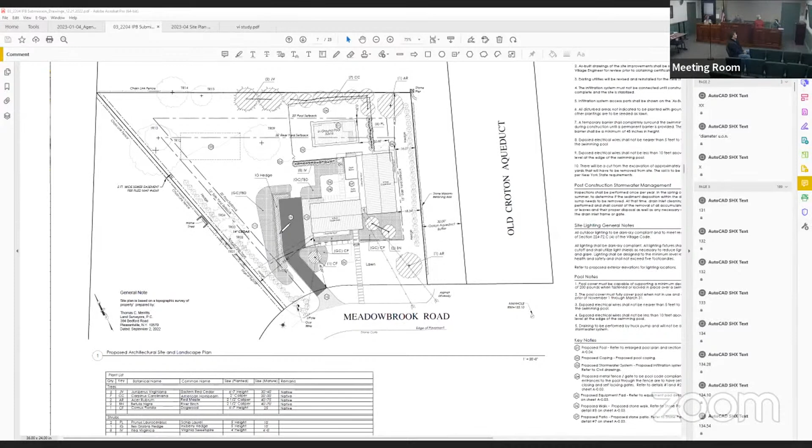And it's going to be rather steep, and if anything can grow on there. And what would you say the wall, 30 inches high from grade? I think from the top to bottom we're targeting trying to keep it at 30 inches, so not very much wall.

The other thing, and I asked Doug to look at it, the retention basin is at the lowest spot in the property. Take a look at how effective the retention system will be, since it's going to be collecting surface runoff, because it's at the bottom of 2 hills, going from east to west and from south to north. The contours head north, so there's drainage coming from both directions into the retention area.

Yeah, and I think it continues to drain off to the west, off property. So is the tributary area analysis, Doug, what you need to address what Caesar just spoke of there? Yeah, I mean I think he was concerned with surface water ponding, Caesar, is that right? Yeah, and then running off to the property next door.

That is where it's going now. There's the pool there, of course, but we don't want to make it worse. As John mentioned earlier, there's no system now, and they're going to be treating the entire house, so we haven't looked at calculations yet. We still have a lot to review as far as stormwater goes.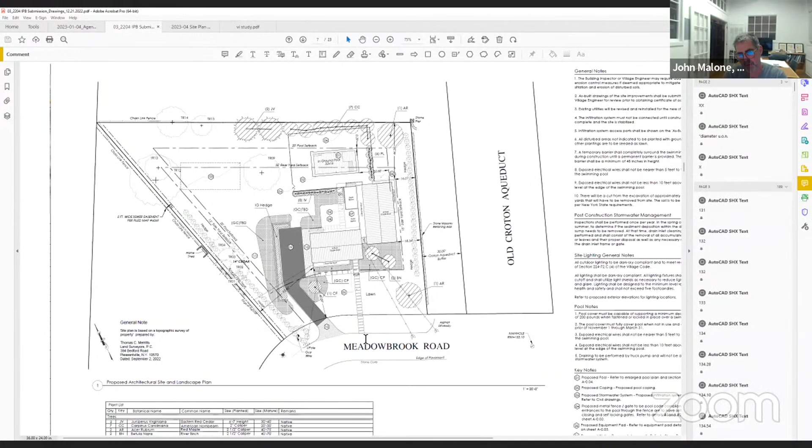Like we have this path to the street. I think that's questionable, you know, the impact of that in terms of, that's part of our 8%. We have some other flat work outside, patios and stuff like that. So that's something we can work on to try to make that up.

The reason I bring it up is because I do agree with Caesar. I think in this situation, though, we need to balance the sacrifice that the owners would have to make to meet code, since it's such a small difference. So it might be good to know why that 8% is necessary, how severe of a negative impact is that going to have on the owners, and that way we can balance the impact on the town with them having the house they want.

Right, and I think that's some of the things that I brought up. Part of what the Irvington code is, it treats every piece of coverage similarly. So if you have a stepping stone, it's similar in terms of coverage impact as the building. So part of the things that we would say are over coverage, that's very different - we'd have to get rid of the garage.

Right, so we're looking for stepping stones. I think it's easier for us to push on - maybe you can do something with that, as opposed to, listen, we have to take away a room.

Right, I mean, sometimes I'm sort of concerned - I don't think some of the coverage that we propose, like stepping stones with grass joints through this area, I'm not sure what the negative impact of those are. So when we are over on coverage, it's usually with items like that, where there's an inconvenience to the owner of not having that.

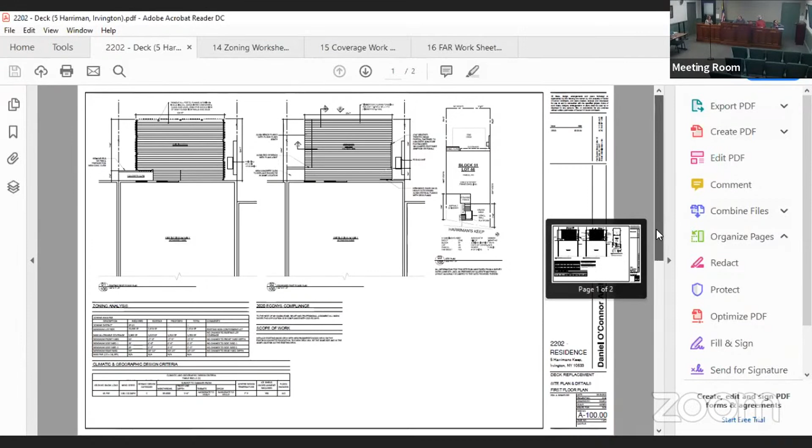Okay, there's several questions we have. One is the coverage issue - the building inspector needs more accurate coverage numbers. It appears that the deck is getting bigger.

Is that true? You said replaced in kind, but is it in kind or are you making it bigger? We are maintaining the same profile. We were basically lowering the grade to avoid one step from the house to the existing deck. We're just adjusting the height so it would be one continuous surface.

Anyway, the coverage numbers need to be fixed. You need to meet with the building inspector and go over the coverage numbers. I think you need homeowners association approval, and we didn't see that if you have it.

There's also an issue. You're in the middle of the row of houses, so you're going to have to have construction access. You're going to have to cross over other people's property. We'd like to see how you're going to do that, and various approvals from whoever's property you need to go over to get to what you're doing.

I believe we can go through our property. I believe everything could go through. If there's trees involved, you need to show tree protection. You didn't show anything—the plan I'm looking at doesn't show trees. There may not be any trees, but you need to show that.

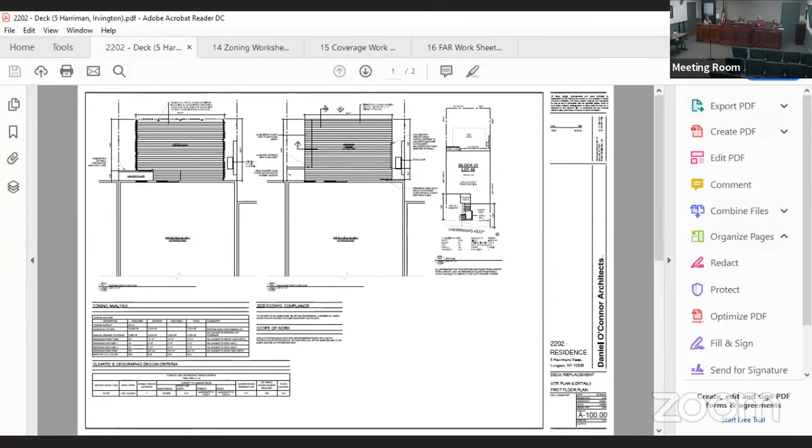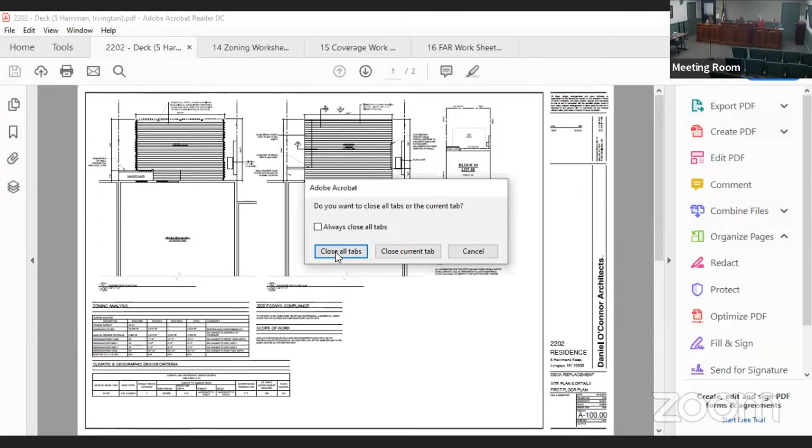Next one is number 15, 2023-02 at 73 Station Road.

Hi there, good evening again. Go ahead, identify yourself—we know who you are, but go ahead. James Krapp, Studio Park, representing the owners of 73 Station Road. Hopefully I can keep this brief.

This is the first time seeing this application. However, it's a very minor FAR addition that has triggered us to planning board. We submitted this to the building department, similar to the previous application, in hopes that it wouldn't necessarily cause any issues with planning board, as it is no change to coverage. However, it does change a small 7 square foot of FAR that is actually not technically inhabitable, which I can explain in slightly more detail.

I can share my screen now and explain the application. We did receive Han and Nolan's comments earlier today, most of which can be easily addressed, but I can speak to the whole of the project a little more entirely right now. Can you guys see my screen now? Yes, yes, yes.

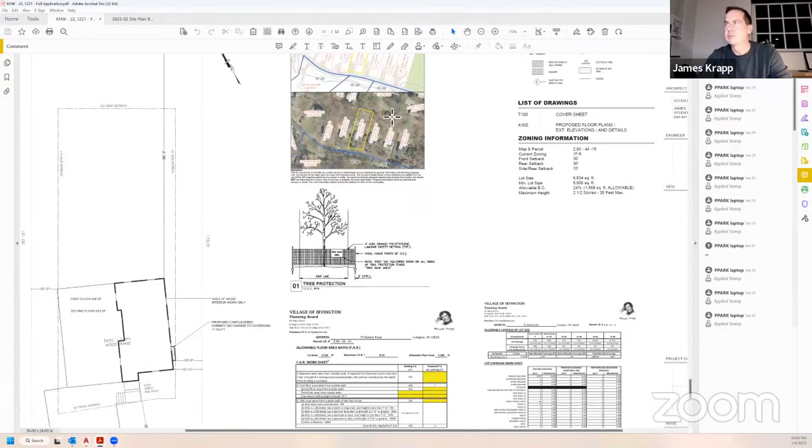Okay, so we're all familiar with Station Road. 73 Station Road is just beyond the aqueduct wall, four buildings in, or three buildings in. Everything in this area has been built or expanded upon except for this property, to the best of my knowledge—maybe 85 hasn't been. So you've probably seen a lot of these over time or been familiar with the region. What we're proposing at this time is a very simple addition onto—and hopefully you can see this right here in this region.

We simply want to add a cantilevered fireplace to their living room, and then subsequently some interior renovations that don't impact the planning board application. That small impact, however, is this 7 square foot addition right close to the existing border of the existing property.

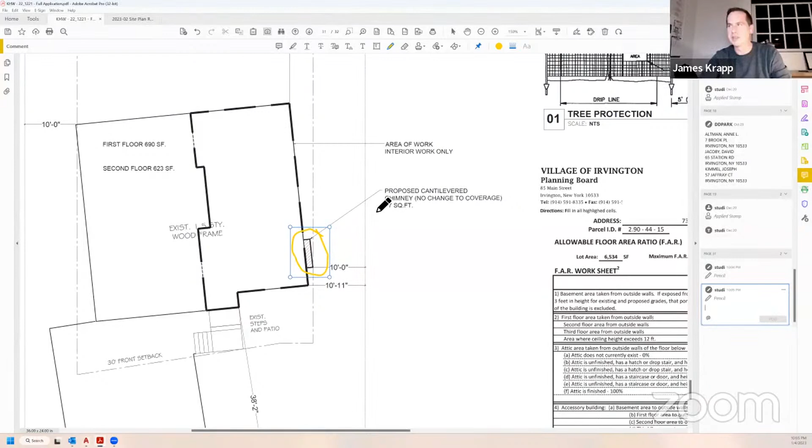When this was purchased by the owner, there have been no changes to date. Nothing has been updated in any way, shape, or form. This is the first proposal that's been put forth to the building department, planning board, et cetera. So that chimney has been proposed.

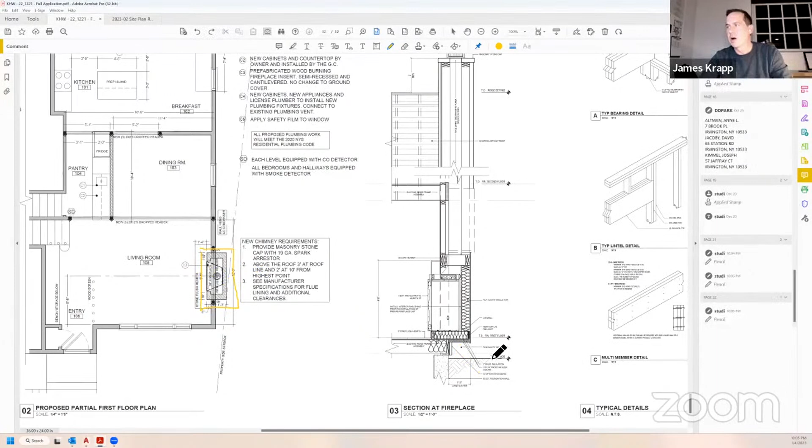Subsequently, related coverage issues have been brought up. We don't believe there's any coverage issues for the fact that this is only FAR and we're not actually touching the ground. We propose this fireplace addition, which is semi-inside, semi-outside, as cantilevered, not actually touching the floor of the actual property itself. This is an off-the-shelf fireplace wood-burning unit and chimney sleeve that is being proposed, just this addition, as you can see. And that's what's being proposed at this time.

The majority of the comments came back were clarifying existing trees, which we haven't fully noted. We have requested a full survey of the property, however, we just haven't gotten it in time due to backlog, and the fact that we didn't necessarily think that this was impacting coverage or any real changes to actual planning board issues, zoning board issues, et cetera. So we're working on getting those things. However, we think this is a fairly minor application and something that we don't think is creating great impact. We look forward to any questions or comments you might have at this time.

On the face of it, you're right, but then when you look at the codes, there are some issues. And you're right, you need a survey to make an accurate site plan, because the coverage issues and side yard setback are not clear without an accurate survey, if there's a side yard setback variance that might be needed.

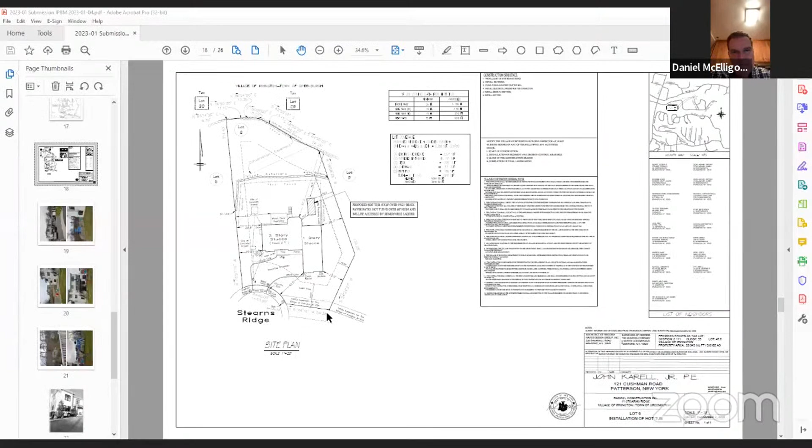Okay, this is the proposed hot tub. It's going to be completely in compliance with the town requirements regarding setbacks, completely in the backyard of the property and within the setbacks. This is a portable unit that will be imported and installed and operational. It will have an electrical connection, and it will be filled with a garden hose - not a huge amount of water required to fill it. The unit is an oversized hot tub, but it also has jets to act as a lap pool for exercise.

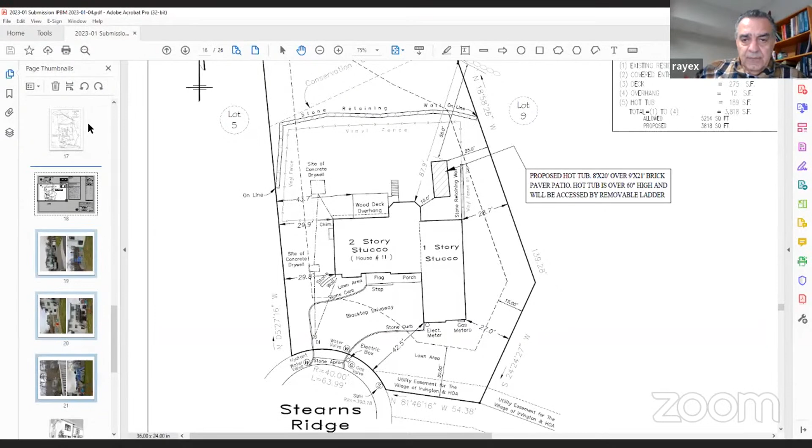The site plan is lacking - you should have shown the play set. And the gravel is part of coverage, that gravel there. Okay, and you've got what appears to be a slab there. I'm not sure if it's a concrete slab. Now, pavers - that's a little patio, a brick paver patio. Actually, that's where the unit is going, on that patio. So the owner installed that without approvals? I really can't answer that. Well, this is exactly the same size, so I cannot answer yes or no on that, I don't have that. The gravel needs to be included as part of coverage. We will do that, and if that increases our coverage, we might propose to remove it and replace it with grass.

Those are the items we saw in the comments from Han, and we will be addressing all of them. Like I said, we will comply with everything that needs to be complied with. And it's 5 foot high - you need to provide screening. Do I need to provide screening for it? That's not a question, that was a directive. You need to provide it.

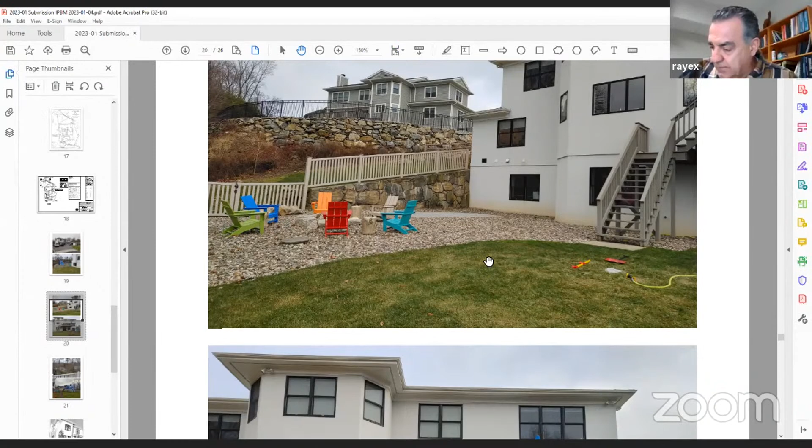I suggest you contact - or in Doug's letter, I'm sure he addressed the screening issue by referring you to Susan Nolan's comments. Caesar, if I recall, she might have mentioned that because of the location, maybe it was already screened in that direction, but the other direction, Doug, I think she still was looking for something coming from the other direction. I forget which is east and west, well, the opposite direction from that.

Like I said, we will address most comments that we can address before we come back to see you again. And there's fencing that has to be addressed - yeah, that fence doesn't comply with the pool code, the village pool code. Even though the unit itself is more than 5 feet tall, because it's like an above-ground pool, it doesn't need a fence. The fence that's there is 4 foot high. So the screening - our village screening code requires a 5 foot fence, and the state building code requires any pool over 4 feet to have a fence around it. They're 2 separate code books, you can't intermingle them how you feel. So the bottom line, Ed, is you either need to put a fence around that piece of pool, or you need to raise the existing fence up to 5 feet. Okay, okay.

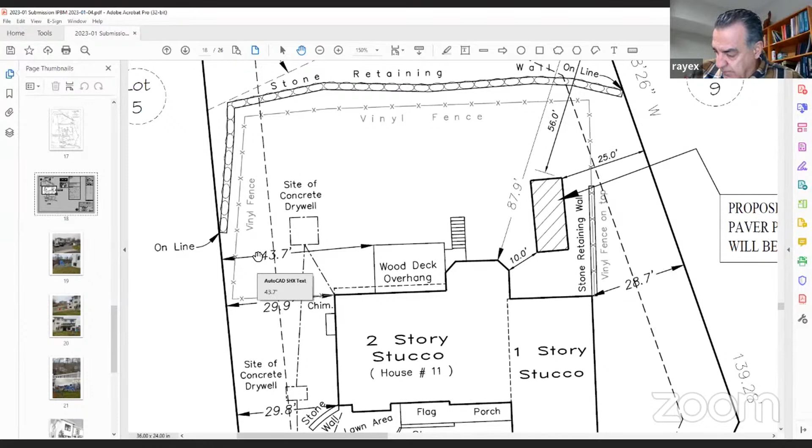I'm just writing notes as we speak. That's fine. Okay, I understand where you were going too, but unfortunately it doesn't work that way. All right, we'll see.

We'll address the items and communicate to make sure we resolve all issues on hand. It should be noted there was a letter of support from 5 Stearns, Amy Sif. Mike, do you have any comment? So was it the intention for this tub to actually be portable?

Yes, it's a portable unit, and we submitted a copy of the brochure on it. So what will happen with that tub at the end of the season? You can use the hot tub into the cold weather. No, you can still use it in the winter because it's a heated hot tub.

I have been in a hot tub where it was 5 degrees below up in Vermont. Once it's in its location, the intention is for it to remain there, right? Correct, yes. It's portable, but it's going to be permanently installed. It's not going to require excavation and foundation, etc. It's just imported and installed, sitting in place. That's what I meant by portable.